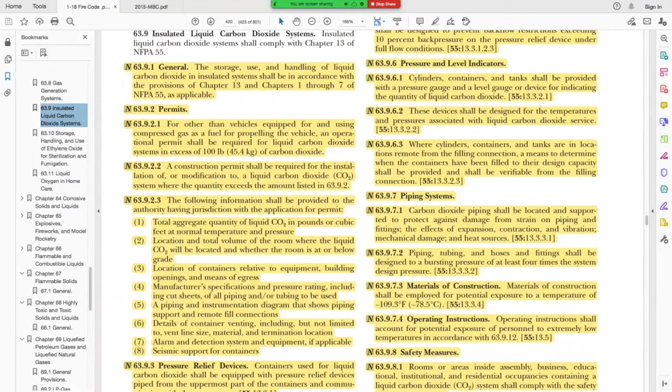Let me see how bad I'll mess this up, but I'm going to try to minimize this screen and go to NFPA 1 really quick, chapter 63. See if I can get there. If not, bear with me. Again, you probably can't read this, but 63.9 of NFPA 1, titled Insulated Liquid Carbon Dioxide Systems, tells you that they have to comply with Chapter 13 of NFPA 55. And that's what you were referring to, Craig, that particular fire marshal mentioned. The limitation on basement storage of CO2 was less than the 100 pounds.

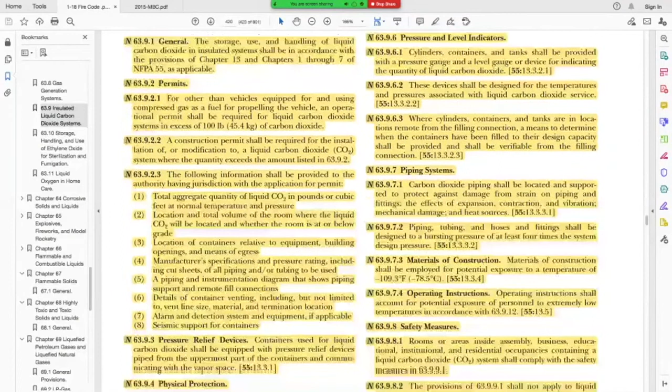So it talks a lot in here about all the particular things: piping, signage, gas detection. Well, what's cool in here is, in gas detection, it actually defines the height of the sensor 12 inches off the floor, and in the area where the gas is most likely to accumulate or leaks most likely to occur.

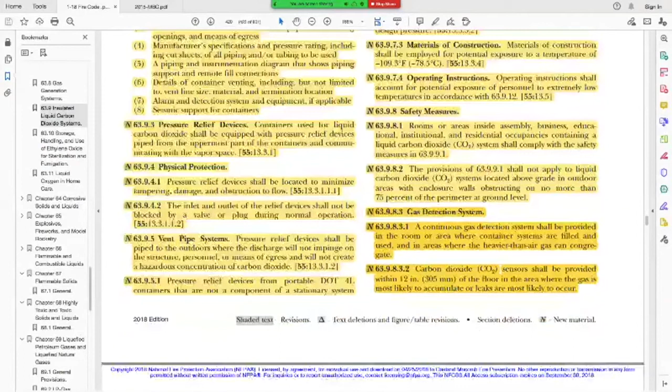Two parts to that. So if you had a gas supply system upstairs and the place had a basement or a crawl space, would the crawl space be an appropriate place to put detection? Of course, because the gas is going to want to accumulate in the crawl space because it's denser than air. CO2 has a density the same as gasoline, the same as propane, as far as the vapors are concerned.

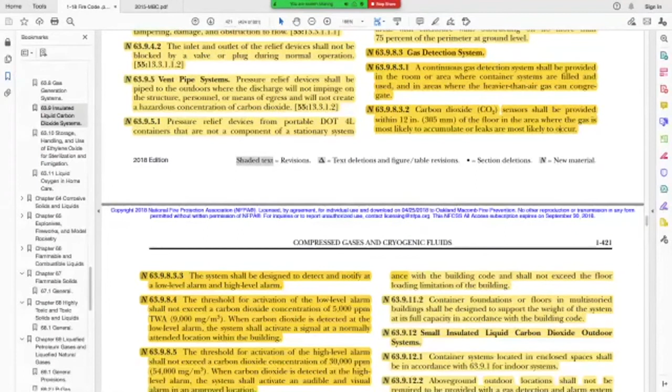The system shall be designed to detect and notify at a low level alarm and a high level alarm. A lot of these devices that are being installed do not have both levels. The threshold for the low level alarm shall not exceed 5,000 parts per million. And when it's detected at a low level alarm, the system shall activate a signal at a normally attended location within the building.

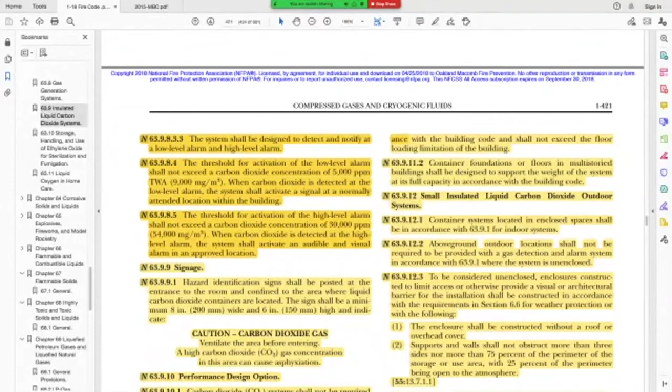The threshold for activation of the high level alarm shall not exceed a concentration of 30,000 parts per million. And when it is detected at the high level alarm, it shall activate audible and visual alarms at an approved location. What is an approved location? Acceptable to the authority having jurisdiction. How is the authority having jurisdiction going to determine if it's an approved location? It's going to require some thought, and it should not be arbitrary.

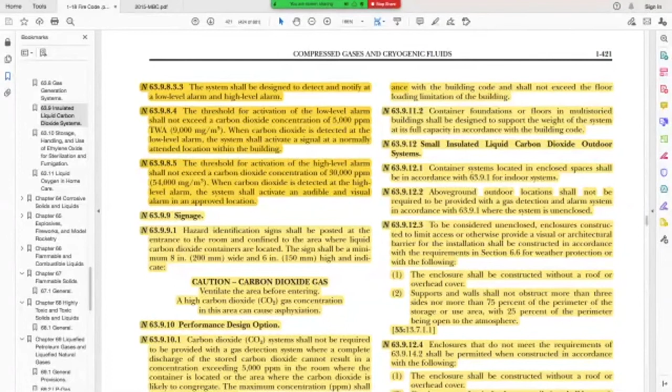The gold standard, the typical industry standard for locating audible and visual would be, if in doubt, default to what a fire alarm system asks for its audible and visual locations. Typically in the gas detection world, it's inside and outside of each space where the hazard is likely to occur.

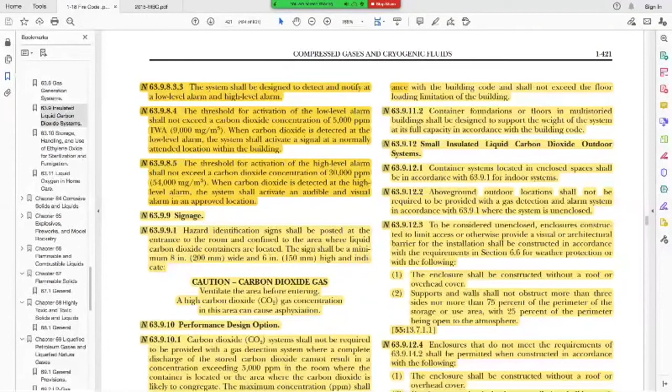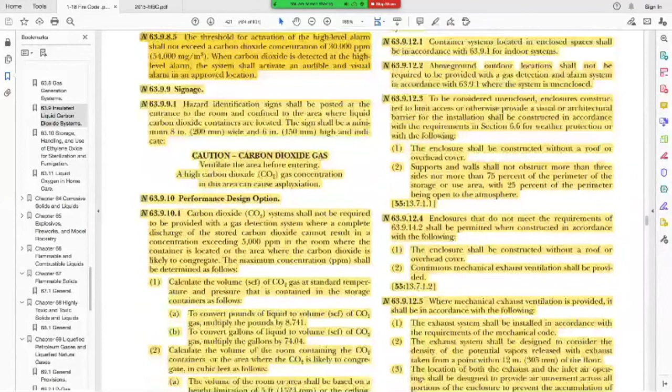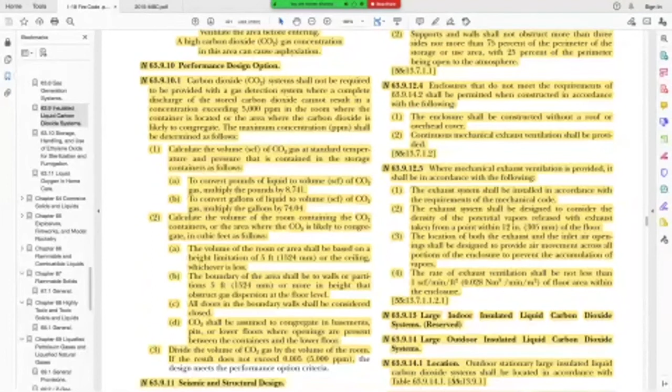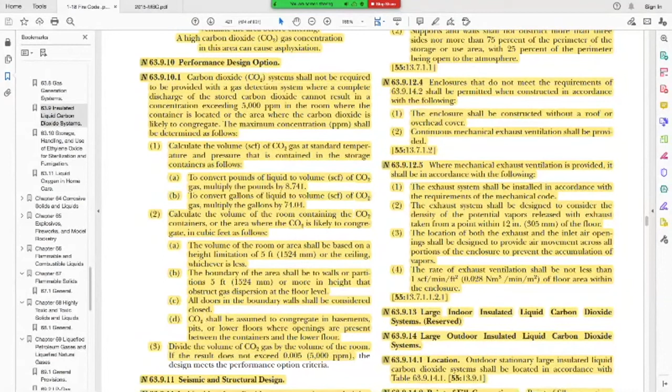Right here, I'll give you the code section number of this performance design option, Craig. It's 63.9.10, or 10.1. And it allows them to not provide carbon dioxide detection in certain cases. And here's the calculation. This goes along with my logic for many years, that the logic behind the calculation on the refrigerant calcs in chapter 11 of the mechanical code is flawed significantly.

The reason is they allow you to use the whole space, including above ceiling spaces, in the volume calculation of the space. Problem is, the gas is denser than air. Typically, refrigerants are very close to the density of CO2. They're usually around 1.5 to 1.7 compared to the density of air. So they are at least 1.5 times heavier than air, average of 1.6. So what they're doing, instead of calculating the whole space, they're calculating the breathing zone.

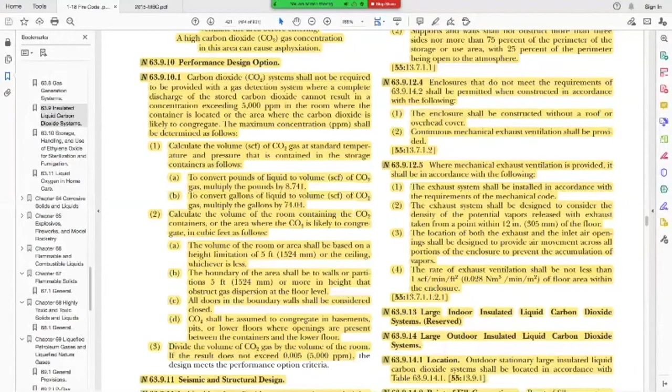I'm going to skip down here to item number 2. Calculate the volume of the room containing the CO2 containers or the area where the CO2 is likely to congregate in cubic feet as follows. So in the case of a cylinder that's up on a main floor, like in a McDonald's or in a grow facility or what have you, you're going to also have to figure this for the basement or crawl space or any underfloor space that somebody could be required to work in for service or anything of that nature.

So they're going to a height limitation of 5 feet or the ceiling, whichever is less. So in a building with an 8-foot ceiling, they're only allowing you to take the first 5 feet of height to do the volume calculation. And the threshold for the calculation is its PEL or OEL level, permissible exposure limit for an 8-hour workday, of 5,000 parts per million. So instead of taking the whole height of the room, you're only taking 5 feet of it. That make more sense?

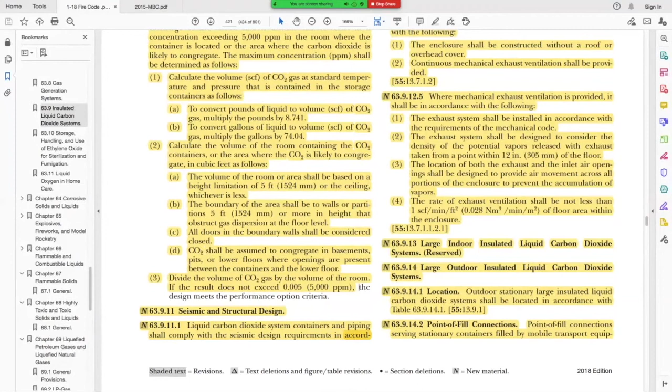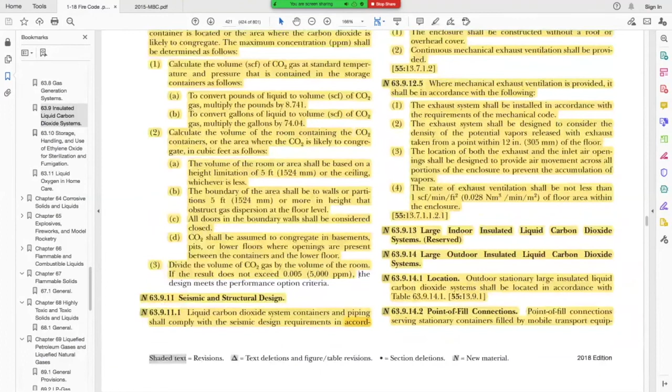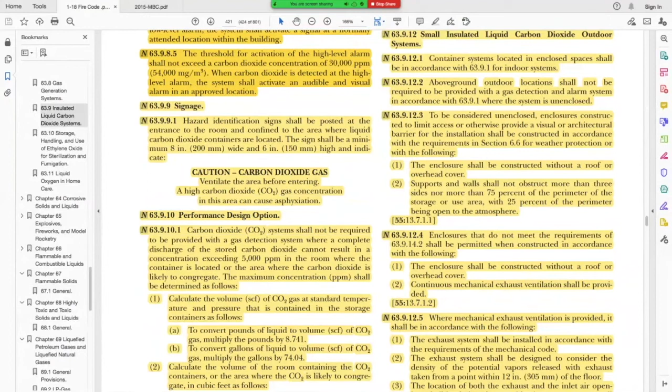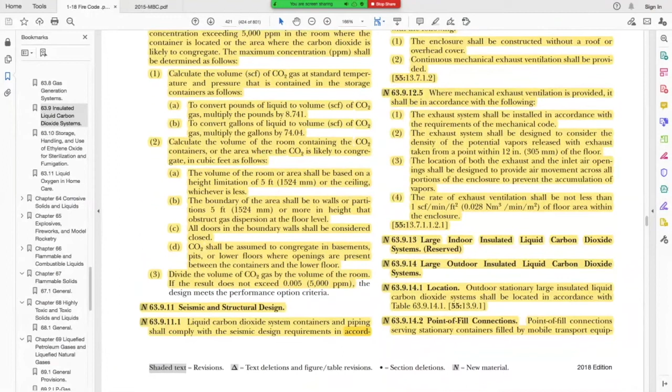To be able to make a good judgment on if CO2 is a hazard or not in a particular space. So I've used this on numerous occasions. A walk-in cooler is always going to fall into the threshold of requiring detection in this case. And so here's your logic to back yourself up as a code official and as a designer, no matter what way you're looking at it. You need to have something to back you up, and there's code language here to do so. I'm going to move away from this code and get back to my presentation screen.

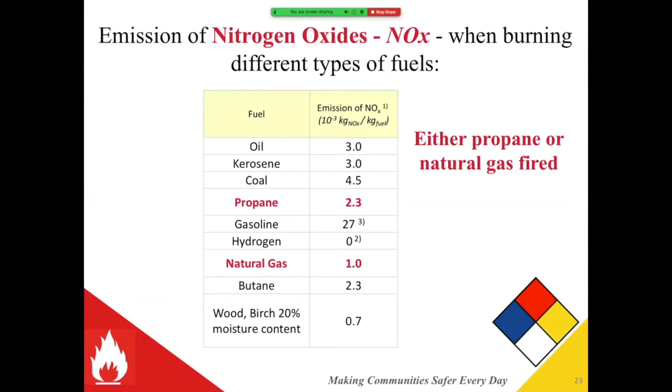And I've seen it in numerous jurisdictions I've worked in where multiple people were taken to the emergency room and some with permanent injuries. I haven't been directly involved in a situation where somebody had died, fortunately, but the first responders have, unfortunately, on numerous occasions.